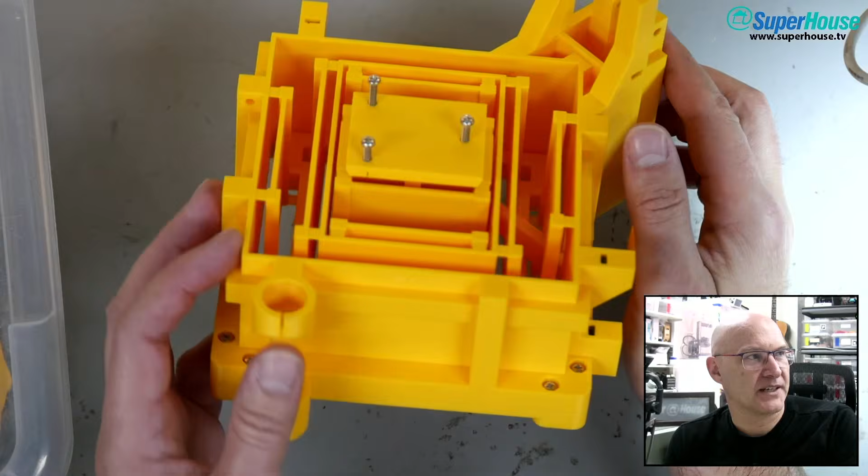So the version of the picker - this is picker v0.2 rather - with the mount here for the microscope arm.

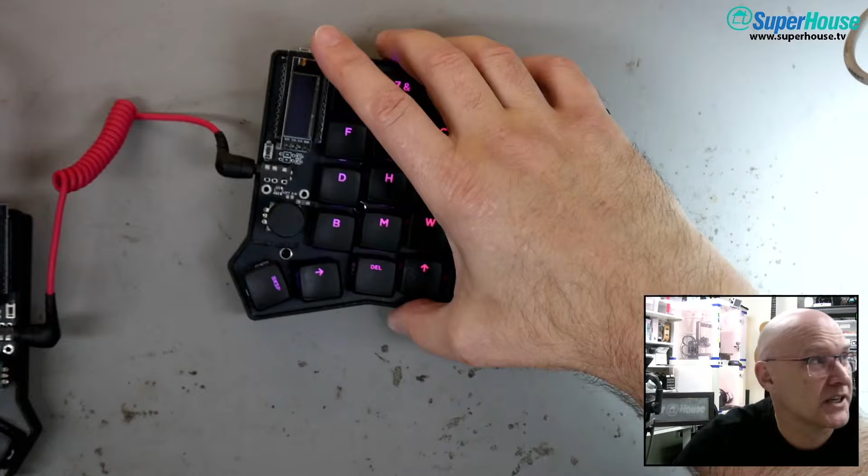So this is my regular daily driver keyboard, which is the Sofle Choc with, as you can see, Dvorak layout. And I've customized, this main part is based on Dvorak, but then I customized the outer parts very significantly.

And these keycaps just arrived during the week. These are the keycaps that I wanted when I was building this keyboard maybe a year ago, but they were out of stock. They've been out of stock. These are, it's a double shot mold glow through, and they are really nice.

I just had a cheap set of keycaps on it for all of this time, and then during the week I went looking, and I discovered that these keycaps had come into stock, so I ordered a set. So I've got a proper set of these keycaps now, and so what I've got is,

Yeah, the way I've laid it out is enter is under my left thumb, space is under my right thumb. So typing English, like just typing text, is really, really quick on this. It's really nice, very low effort.

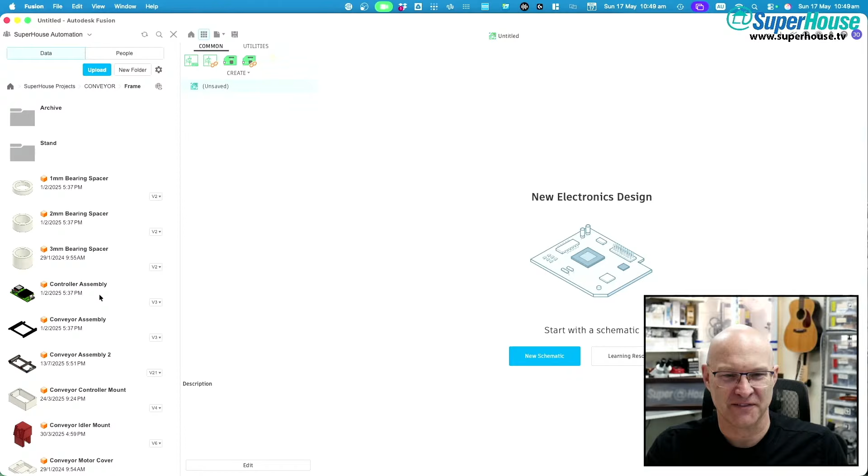Tinker says that explains John's recent tendency to giggle like a kid more - yeah, it does, it does. Cable Tie says I'm visiting Johnny Bergdale's kingdom in December. Ooh, you're going to the kingdom of the King of Sweden? Very good, I'd like to go visit the kingdom of the King of Sweden myself, maybe in the not too distant future. I would like that.

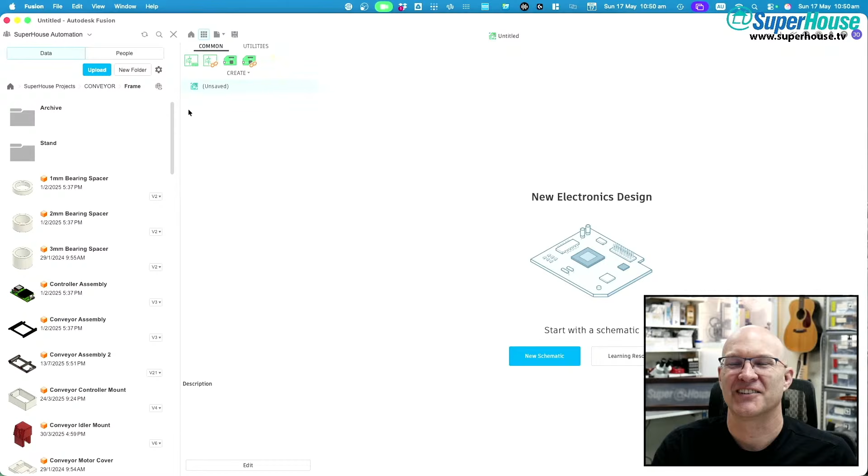I'm just looking at names in the chat now - there are multiple people in the chat who know Princess Fiona in real life, and have known for quite some time, predating me. So I have a question for those people: why the hell did you not tell us about each other like 10 years ago? Oh okay, there were reasons, many reasons. Where are we, NEMA, okay, I'm going to open that one - that one doesn't, right, this one looks better. If you go to Sweden, do you have to get a kebab pizza?

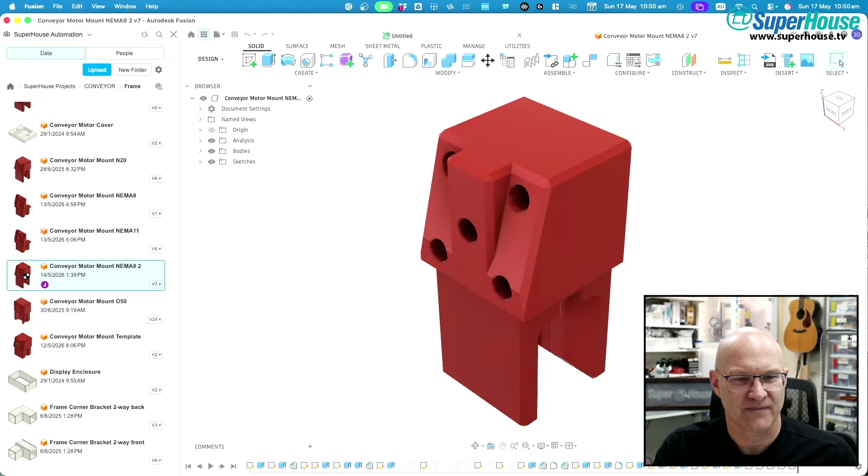Sion says you're so distracted right now, scrolling your file list up and down, up and down. Yeah, it's like a fidget spinner, my hand is on the trackpad and I'm just fidget spinning. I should grab an actual fidget spinner instead.

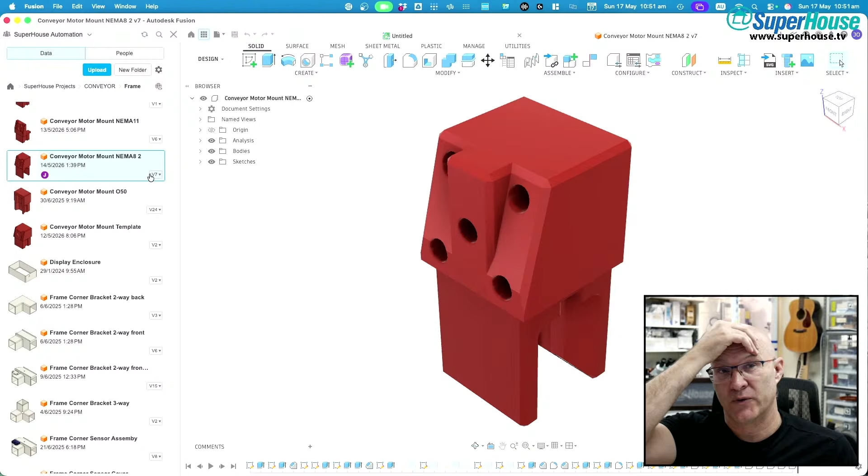Now, I have become very frustrated recently that I do not have functional conveyors on the line. It is breaking me down. Yeah, as Crispian says, the time wasn't right - that's right.

A quick recap of where we left the conveyor project - this was visited probably November, December, I think, was the period where I was messing around with the conveyor last. I can't quite remember. The problem I had at the time was with the drive motors for the conveyor belts. I was determined to use DC motors, and I realize now that was a terrible mistake. I should have paid attention, because if you look at conveyors used on actual production lines, they do not use DC motors, particularly if you have a conveyor that needs to operate at different speeds.

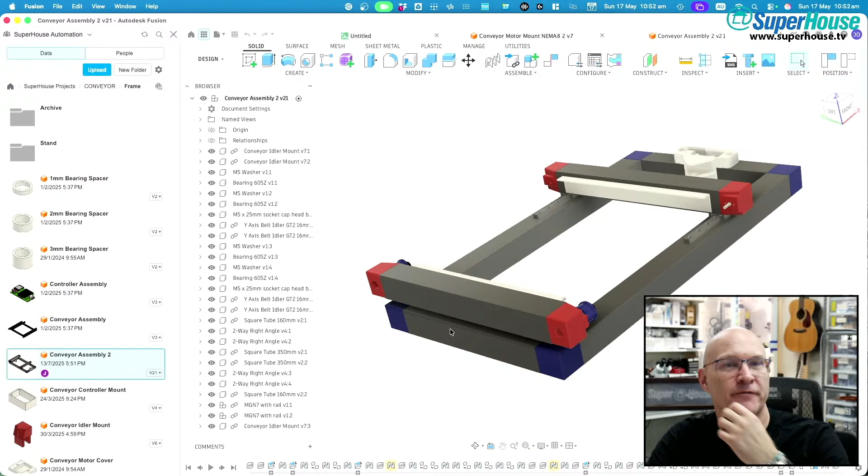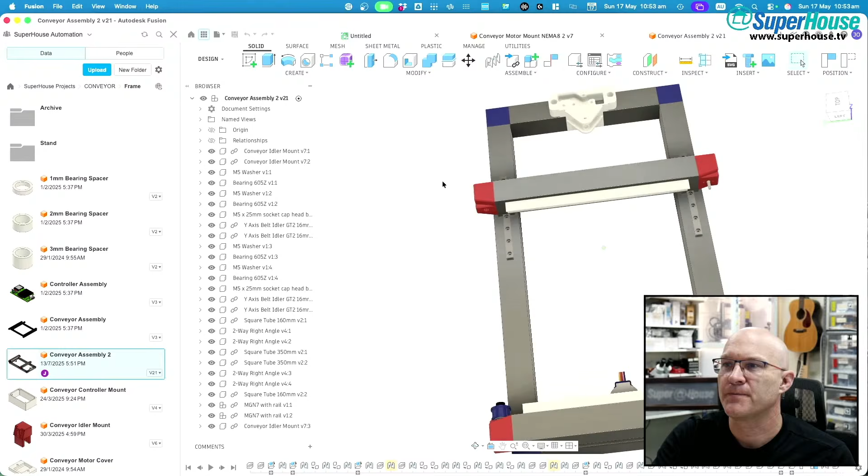What I need is a conveyor that can run through a very wide range of speeds - it needs to be able to run as slow as maybe 115 millimeters a minute up to a few thousand millimeters a minute, somewhere in that range, or faster. It's a very wide speed range. The result is that if you try to do that with a DC motor, if you set up a motor with a gearbox that allows it to hit the top speed on full voltage...

Imagine you've got a 12 volt DC motor, geared such that you get, to use round numbers, 1,000 millimeters a minute of travel on the conveyor, and then you want to scale it down to make it run at 100 millimeters a minute. So you've got a 10:1 speed ratio. If you decrease the voltage, you also dramatically decrease the torque, and it can stall very quickly.

So there are ways around that. You can do things like... Not like there were a whole bunch of viewers asking why in heck you weren't using steppers. Yeah, I know, I know. Oh right, there were. Here it comes. It's going to say it. Oh right, there were, yep. It's because I'm a little slow.

So there is a very wide speed ratio. Now you can overcome that. If you look at things like the way model railroads work, there is a similar situation. If you want to drive a loco so that it starts off very slowly, it starts from zero speed and then very slowly ramps up.

If you want really smooth, low speed control, one technique used for that is modulating a square wave over the drive voltage. So essentially PWMing it, but in such a way that it's at a very low frequency. Not what you would normally consider PWM, which is normally in the many hundreds of hertz up into the kilohertz region - that's pretty normal for PWM driving into a load.

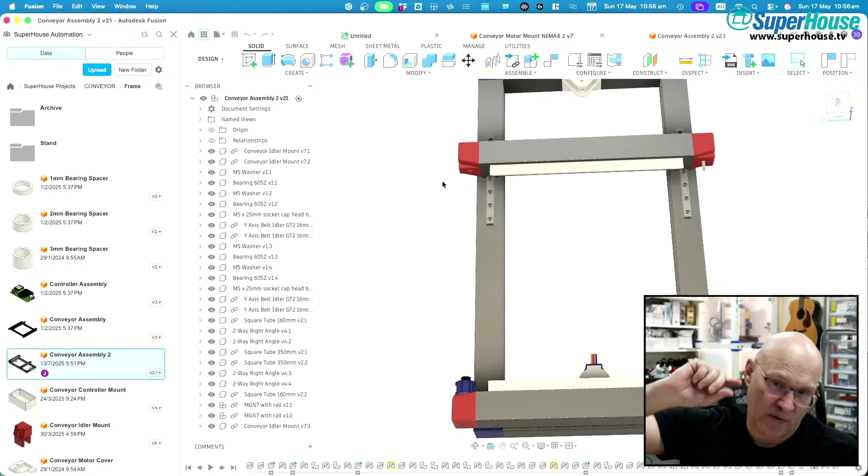By doing very low frequency modulation of the drive voltage, you effectively achieve a higher peak voltage, and it overcomes stiction within the motor. And if the motor is turning slowly anyway, the low PWM frequency can work. But it makes the motors noisy at low speed. So anyway, there are things you can do to make that work, but it's a bit of a pain, and I should have just used steppers in the first place, which has so many advantages.

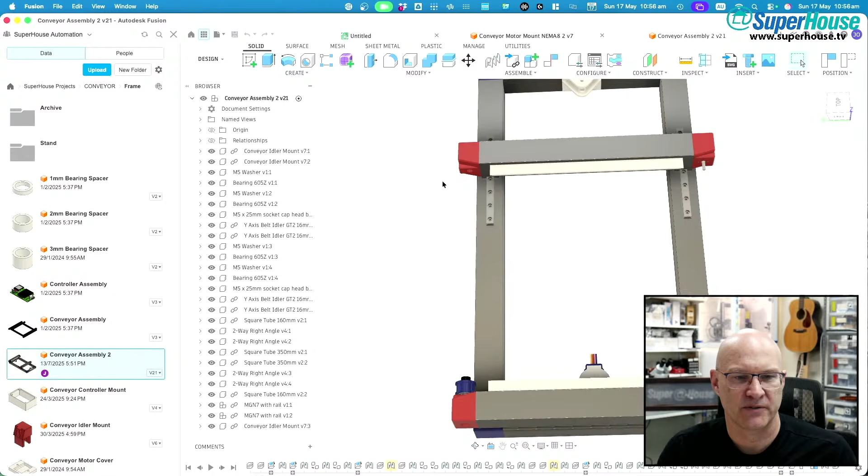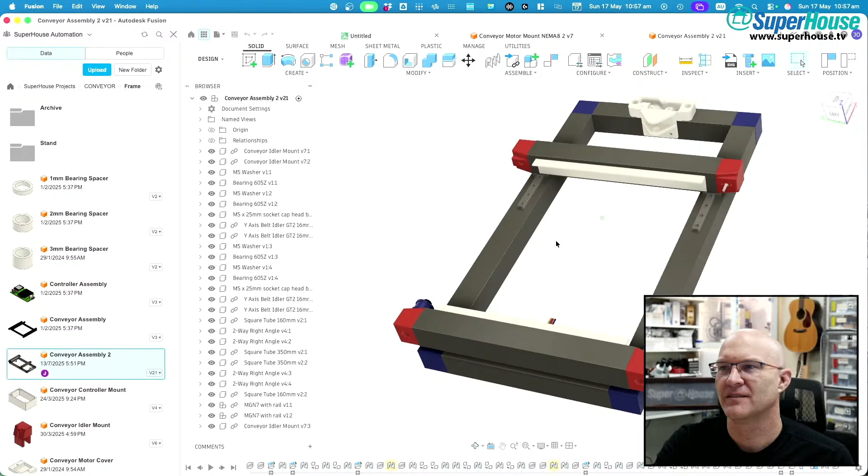Crispian says, I remember my dad had a drill with a motor controller that clearly wasn't compatible - it used to chatter and sputter at low speeds. I think he'd attempted to use an SCR. Okay, yeah. John said, having missed the previous chat about this, you should use steppers. I'm learning slowly. At Tinker001 said, my N-Gauge RR layout used rheostats to control speed. Yeah, N-Gauge railroad layout, use rheostats. Yeah.

So, where am I? Where am I up to? Okay, I went through a couple of options. N20 motors were what I was using. An N20 motor works really well if you don't care about that wide speed range. If you do the calculation on the gearbox, N20 motors come with a whole lot of different gear ratios. So you just figure out based on the linear speed that you want the conveyor.

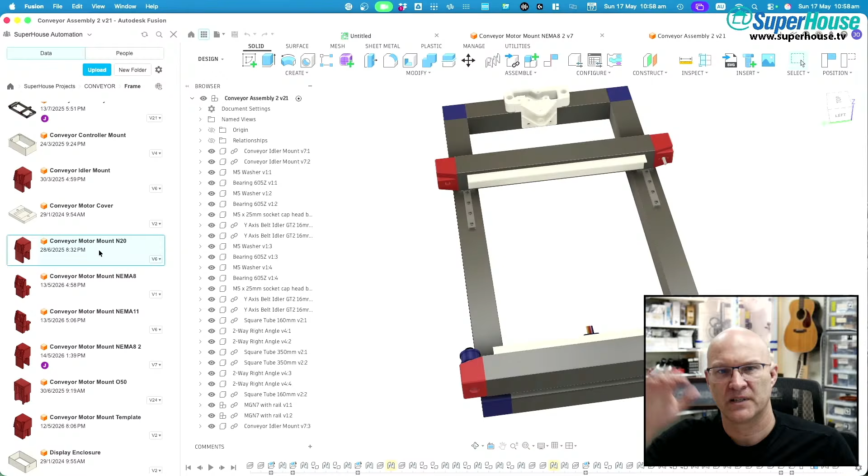Say you want it to run at, I don't know, 500 millimeters a minute, which is quite slow, or maybe a couple of thousand millimeters a minute, which is a more reasonable speed. Then you do the calculation based on the radius of the drive wheel and therefore the rate of rotation of the shaft, and figure out the gearbox ratio. So you just buy the appropriate motor and make it run at the speed you want. That's not a problem. So that was my first version.

My initial prototypes of this conveyor ran nicely with little N20 motors. The problem was I could not make them go super slow. And I want to be able to make them vary in speed because I want to do things like have them accept a PCB from the upstream device at high speed, and then in the case of the conveyor that feeds it into the reflow oven, I want it to slow right down and feed the board off at the speed that matches the conveyor on the oven.

Mine is set currently, I believe, at 115 millimeters per minute. So if you stand there and look at the conveyor, you can see it moving, but only just - it is really slow. So I need to be able to feed the board off at that speed, but I want to be able to load boards onto it quickly at a much higher speed.

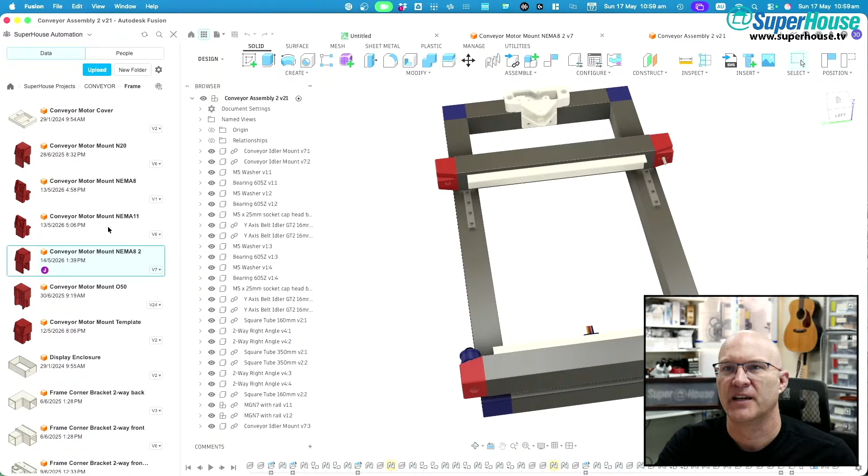So I've done the N20 mount. I experimented with the O50 motors, which are physically a lot bigger, thinking that would give me the torque I needed at low speed. It did not. So last week I pulled out some NEMA 11 and NEMA 8 steppers and experimented. NEMA 11s are physically big enough, so this is a mount for a NEMA 11 to go into the end of the conveyor.

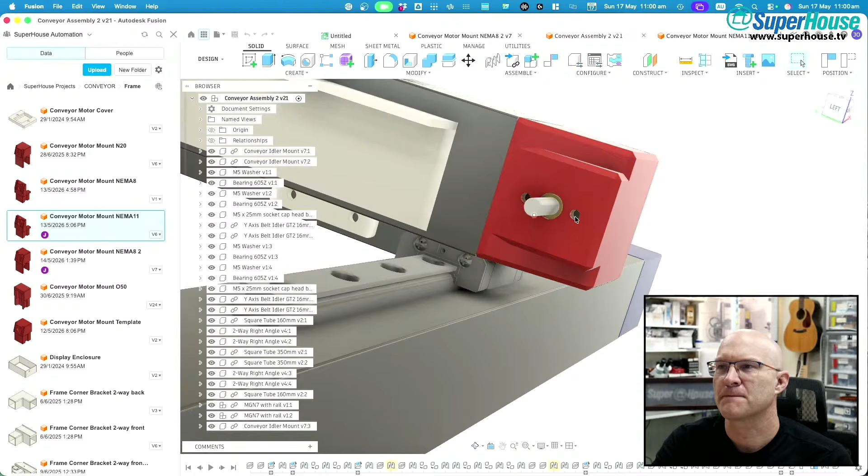So if we look at this assembly, for example, this has got an N20 motor. Replace the belts with rollers. Each roller has its own stepper - yeah, if you're a bajillionaire.

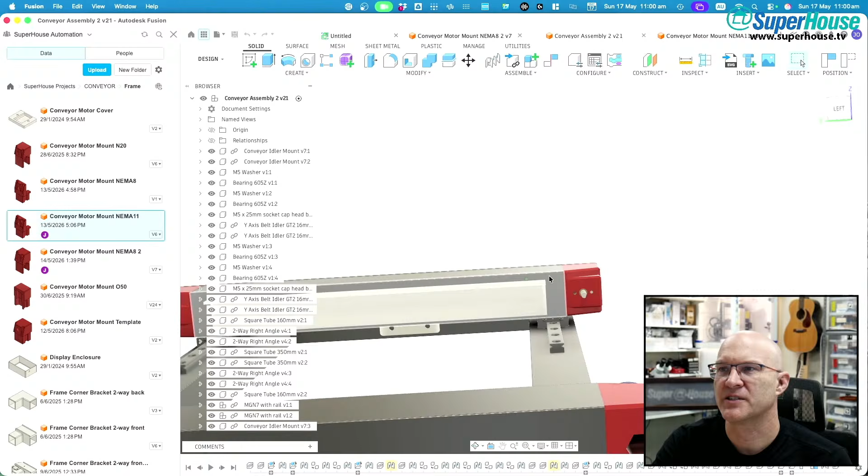So this is the mount for the N20. The distance from the center of that shaft to the center of the idler shaft at the other end has to be fairly precise. It's got to match the length of the belt that goes around it, and then there's a bit of tension adjustment. So this is fixed - this end has the shaft at a fixed position. And I sized this based on the dimensions of the N20 motor.

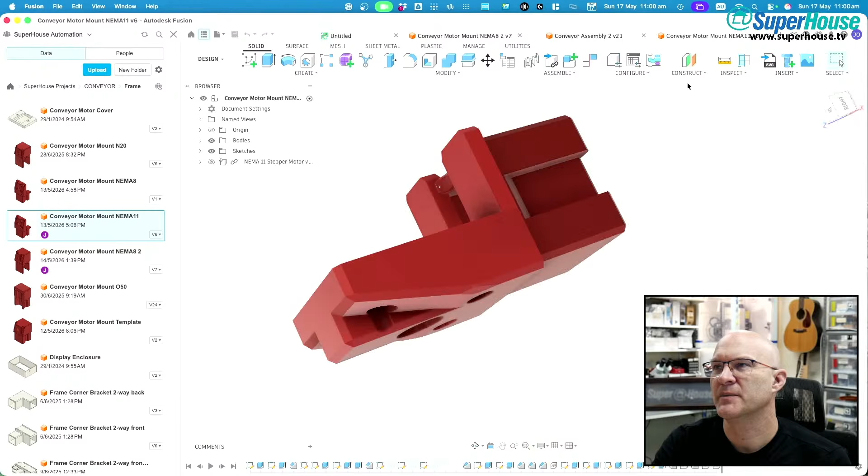But then if you go to a NEMA 11, because they are physically quite a bit bigger - do I have an assembly here? Maybe I don't, I thought I did.

That could be programmed as a linear accelerator - yeah, achieve ballistic board launching.

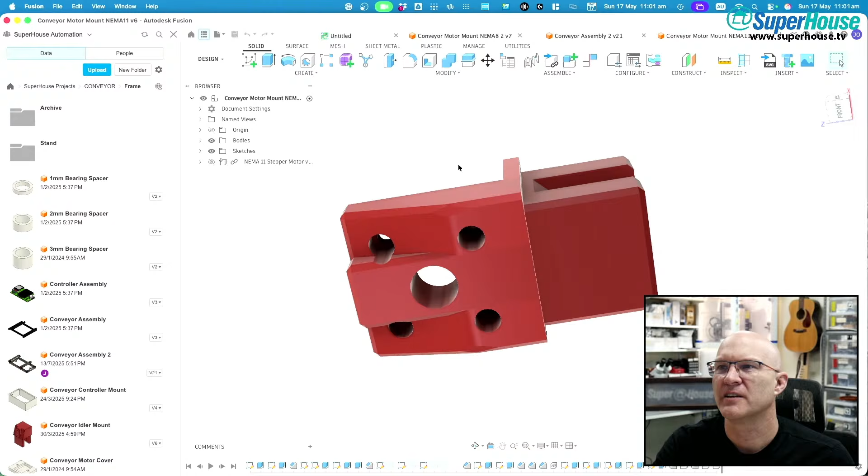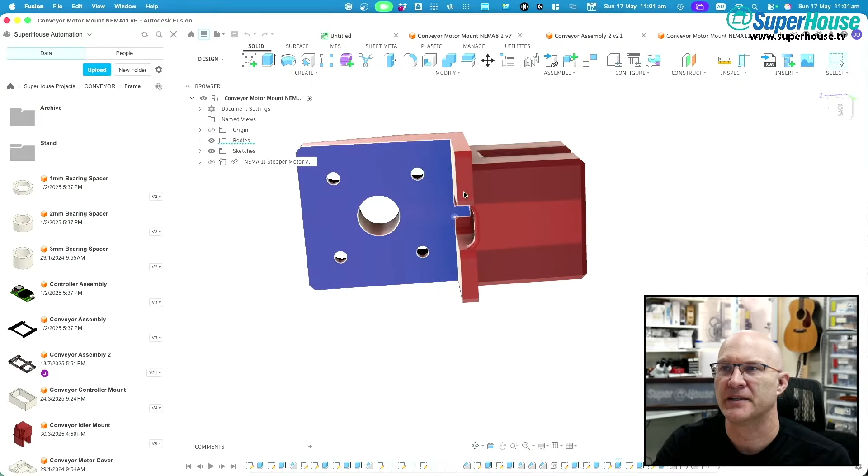So this would fit a NEMA 11 stepper with the cable wrapping around the body, going through this hole and then passing through the inside of the frame. But in order to do this, if you think of this as a square, that face where the stepper mounts, I've had to make bigger, which means it is higher and lower to keep the center shaft in line with the center of the frame. And the whole thing has had to move that way, which means the center of the shaft is now further away from the end of the frame, which then has to be compensated for in other ways.

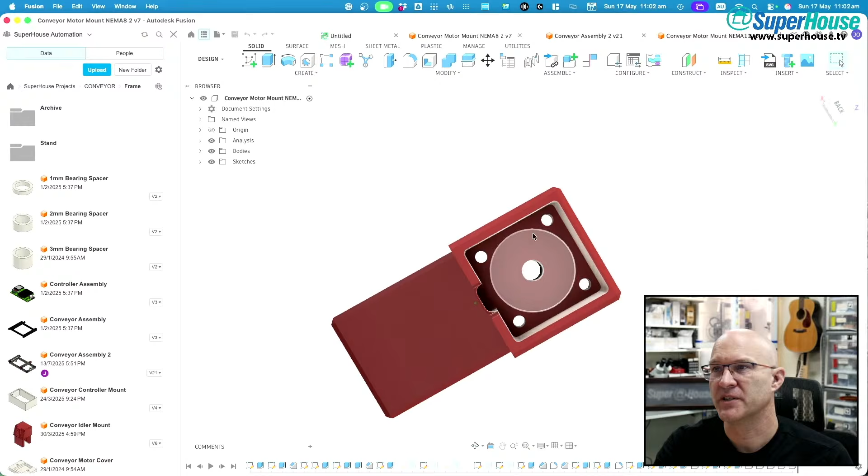So I've designed the NEMA 11 mount and also designed a NEMA 8 mount. This is for the teeny tiny little NEMA 8 steppers, which are so cute. Similar deal, except because it's smaller, it can be fully enclosed. It will sit inside almost the way the N20 motor did and be bolted on from the front. Now there is an annoyance here - in fact, I might close that up. I think I will close that up.

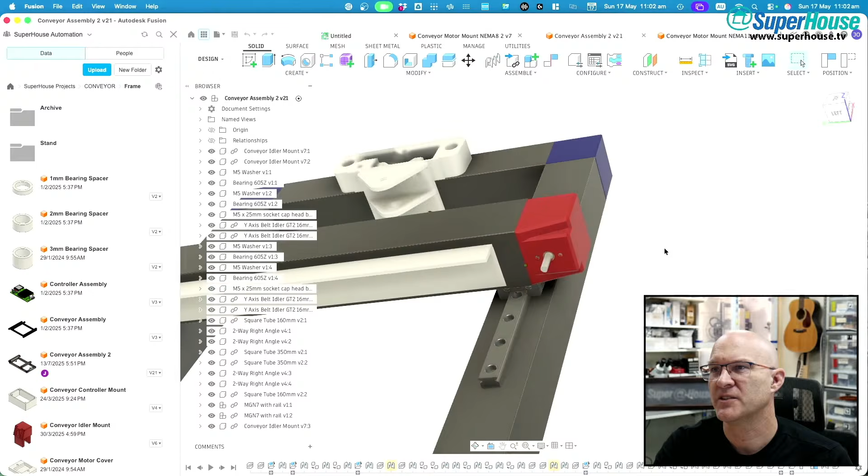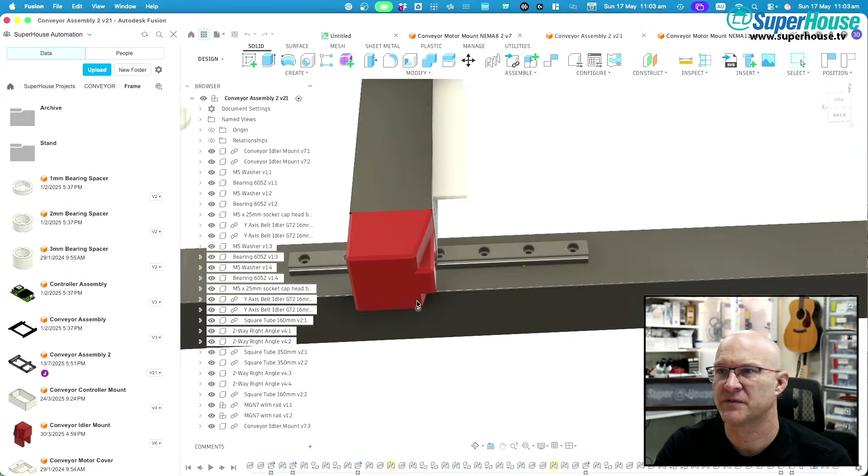The reason there is an angle on here is that's where a board enters, although if it's driven from the exit end, that's not a problem. If you look at it from this end, imagine a board entering the conveyor. These little chamfers on the end here are to guide the board and center it, because it might not be perfectly centered coming off the previous piece of equipment. So if there was a sharp cornered edge here, it could catch on the corner and just jam up the conveyor. So it's got these little chamfers to help guide.

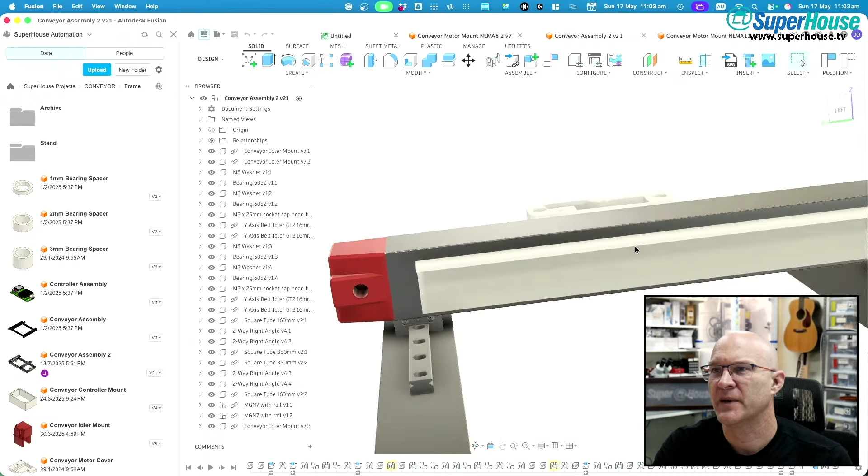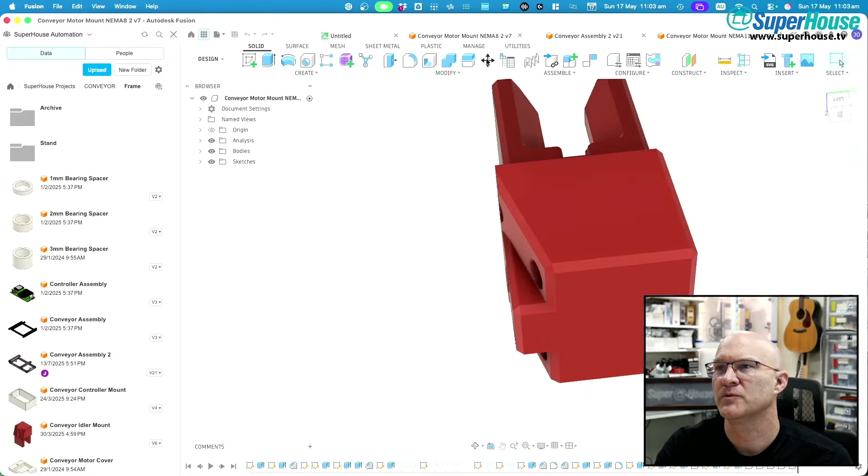So if it's a couple of millimeters off in its position, it'll hit that face and be pushed back into being centered, and it's got that on both sides. The issue is, if you imagine the board rubbing along that face, the lead corner of the PCB could hit this face. So that face needs to be unobstructed - a nice smooth surface for the board to run along. You don't want the edge of the fiberglass of the PCB to catch on that. And with, whoops, this one, right there, look at that - the board is going to hit this face and catch on that bolt hole. So, yeah, it's not ideal.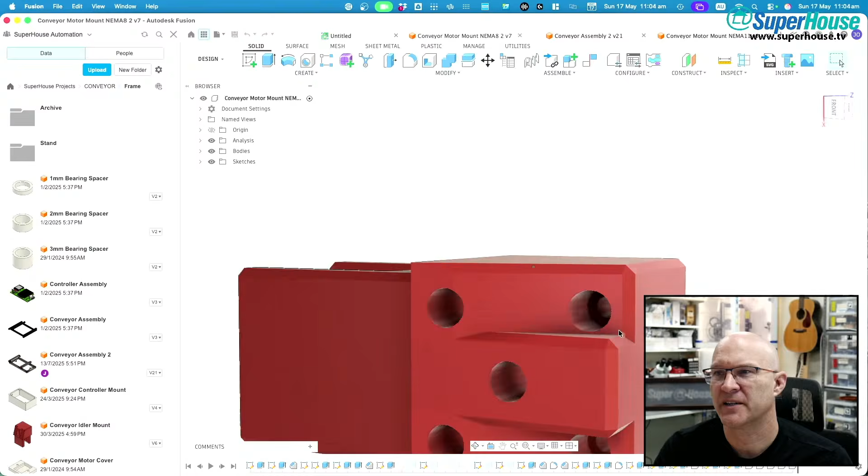I'm going to have to experiment with this. What I might do is remove both the bolt holes that are further back, or maybe I'll make another piece. What I could do is cut this away and make it so the bolts go in and then there is a cap piece that goes onto the top, and that covers it up and gives a nice smooth face.

Simon said, hoping your P&P isn't off by a couple of millimeters. No, in terms of its placement, no. But in terms of the boards coming in on the conveyor, because the conveyor isn't jammed tight against the side of the PCB, there is a little bit of slack. Typically the conveyor is set to be like... Grant Meisel said, just stick a piece of flat plastic on with double-sided tape. Yeah, exactly, that sort of thing. 001 said, if a board hits the face on the exit, something bad has already happened. Oh, if it hits the face on the exit, yeah, definitely. Paul Schultz said, make the chamfer finish earlier. Yes, to all of those things.

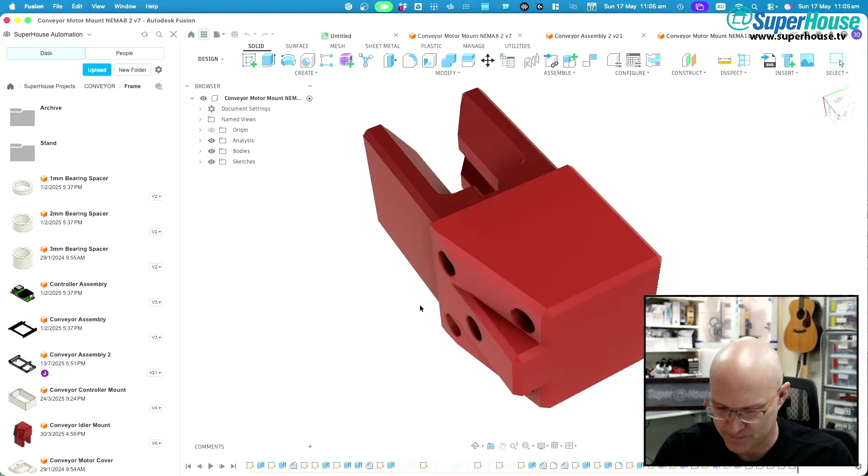So what I was thinking of doing was cutting this face back and making it so that something hard and smooth can be stuck onto that face and provide a nice sliding surface.

It's already 11:05 and I haven't even started on RepRap. So yeah, oh, I've got hiccups now.

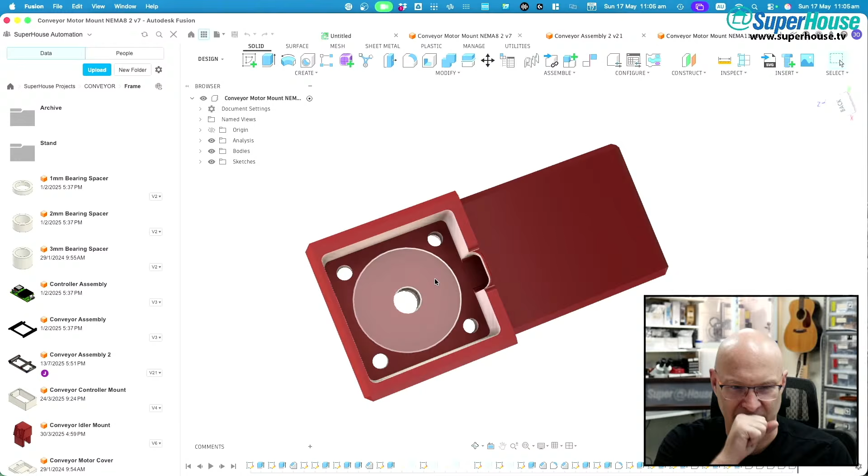Oh, Evil says when the board hits the face, you may need some more space. That's amore.

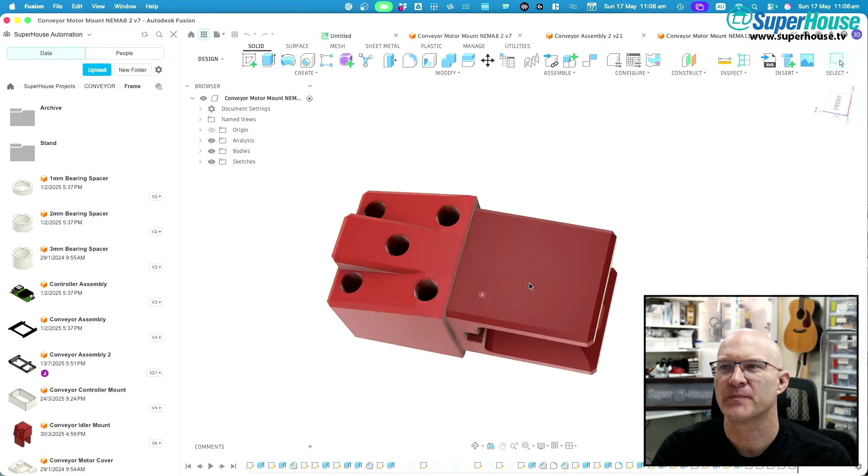Anyway, point being, I am making progress on the PCB conveyor project, but I have not been doing it on stream because I just need to get it done. It needs to be finished. Well, not finished. It needs to get to the point of being functional.

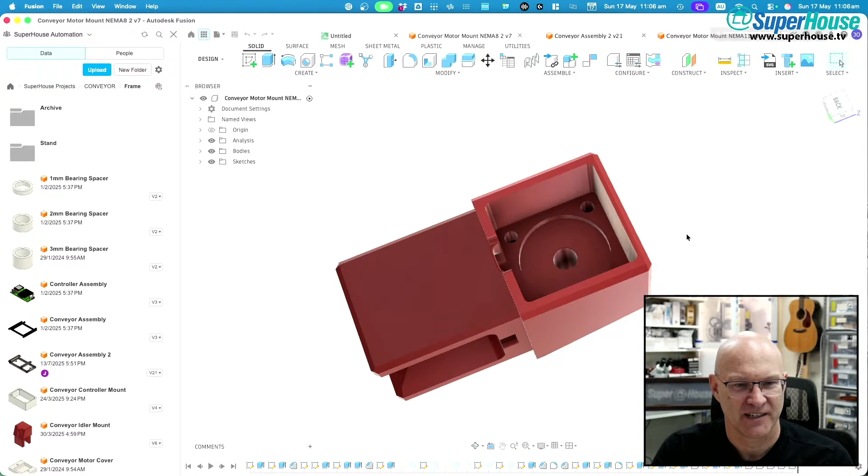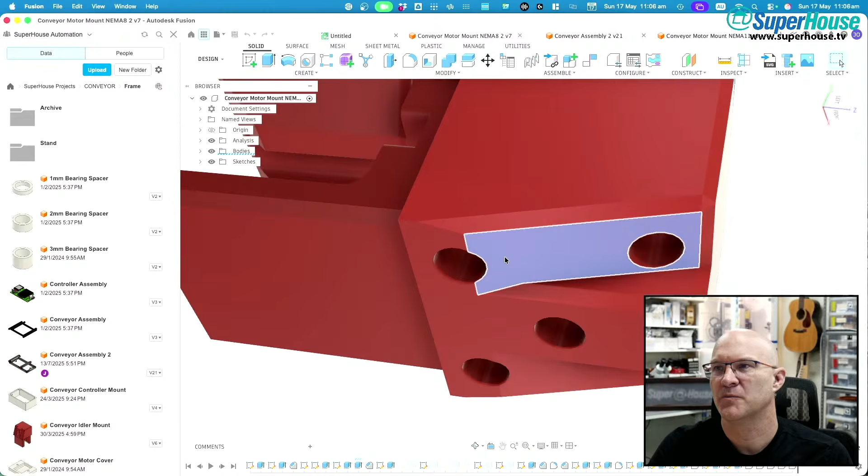And Grant says it will also help with wear, you can replace the surface as the fiberglass wears it down. The thing is that surface could be like a piece of metal, or it could be a piece of laser cut acrylic which just gets inset into it. What I could do is take that face, draw a rectangle in here, and push that face in by say 1.5 millimeters, then laser cut a piece of acrylic that pushes into that spot.

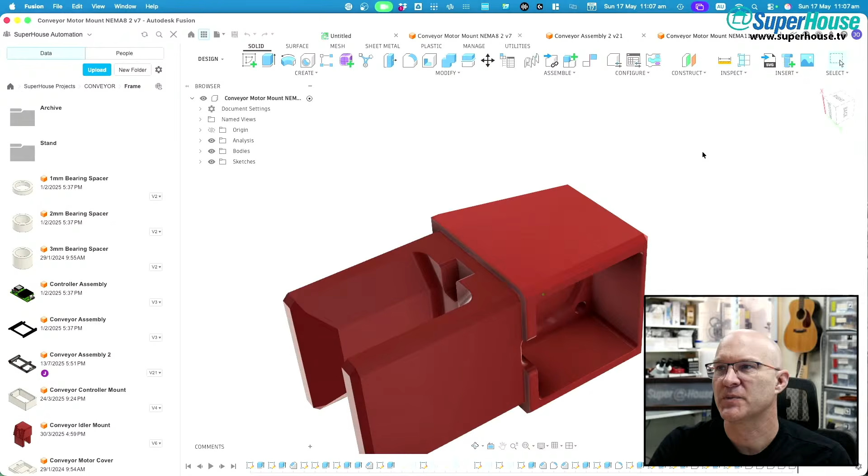And then I've got a nice super smooth acrylic face on there which the PCB would not catch on and should take a long time to wear. Or it could be a piece of metal. So the upshot of all this, I ordered steppers because the only NEMA 8 steppers I have are hollow shaft steppers designed for being the rotational axis on pick and place nozzles, so they don't have the shaft I need to come out here and mount the idler wheel on it.

Finish the design, then have them cast in stainless. Have them cast in stainless. Have them cast, so those pieces could be metal. That seems like massive overkill. But I can get on board with overkill.

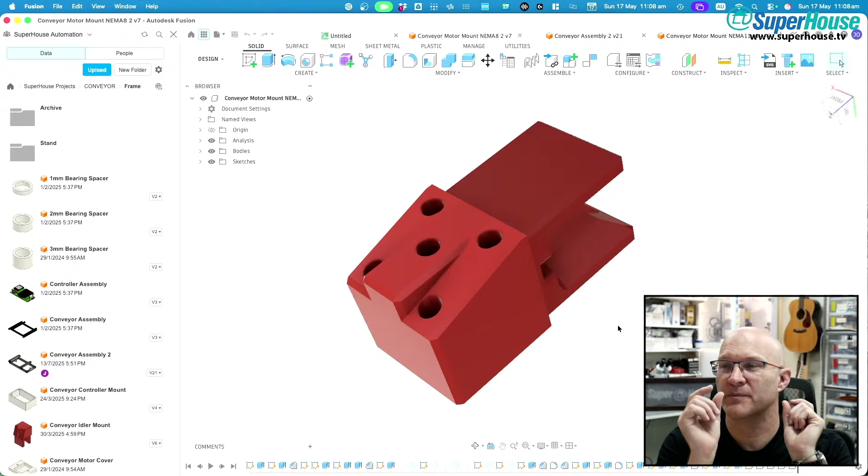Overkill is good. Wagonlight says, can you make parallel rails that open and close at the right time to push the PCB to the center before it enters the next conveyor? You'd have to be very careful though, because you're only gripping the edges, a few millimeters of the PCB edge. If you open too far, the PCB is just going to fall out, so you'd have to open only a couple of millimeters.

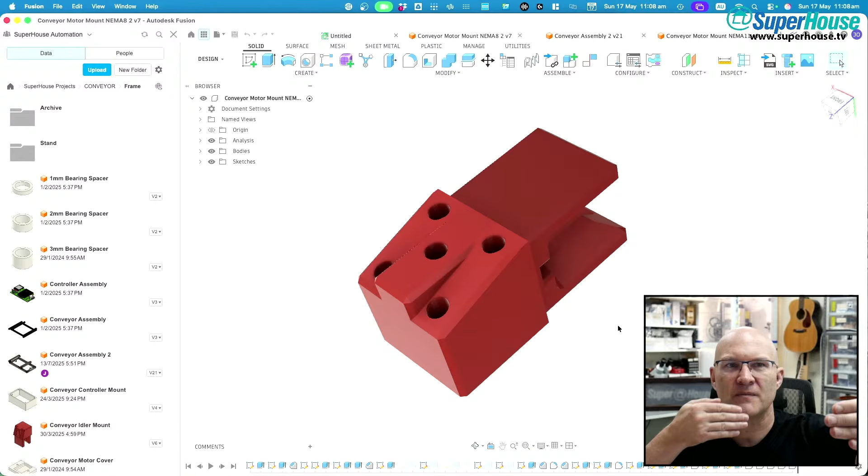Unexpected Maker said, finish the design and then have them cast in pure gold. Yeah, have them cast in pure gold. So what you'd have to do is open the conveyor by only a few millimeters so the board that comes on doesn't just fall on the floor, then close it by a couple of millimeters to align it a bit. But anyway, that all sounds terribly dangerous.

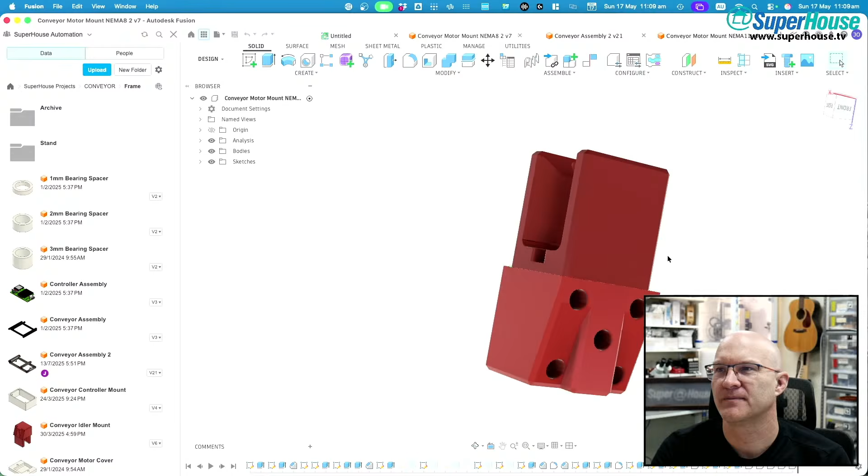And I need to RepRap this Micron. I've got to print some of these, should send some to the printer. I might do that after the stream. Might do it right now. Let's send it to the printer right now.

Save as mesh, yes. And then I am going to... Squirrel, yeah. Tools, X1C, where is there? Do I have a conveyor? PC assembly jigs, do I have anywhere for parts for this? RepRapMicron. I do. Do I? PCB conveyor. Yes, I do, there it is. I just couldn't see it.

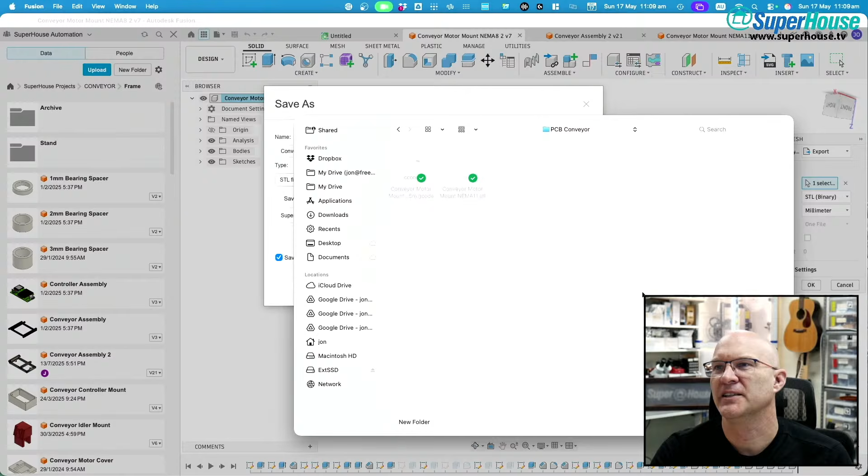So NEMA 8 mount, I did a test print, I believe. Did I actually print it?

I can't remember. All right, now it pains me to do this given all that is going on with Bambu Lab right now. BBL are not popular. Oh, there is a weird thing going on with Bambu Lab where, come on, show all windows, where I cannot get the window to show up.

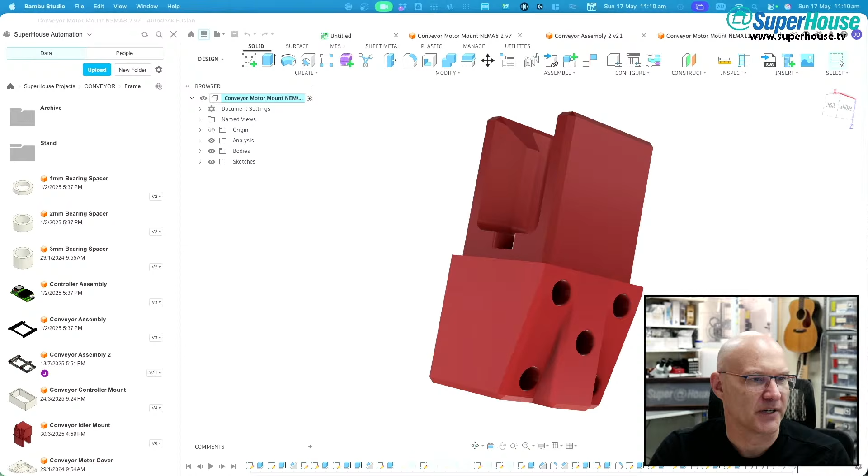Okay, I'm going to kill Bambu Studio. It opens its window off screen somewhere and I can't get it back again. I've tried the gather windows thing and all that sort of stuff. It just... oh, there we go. So if it fails, I've got to quit it. Prepare, prepare. So I feel kind of dirty opening Bambu Studio.

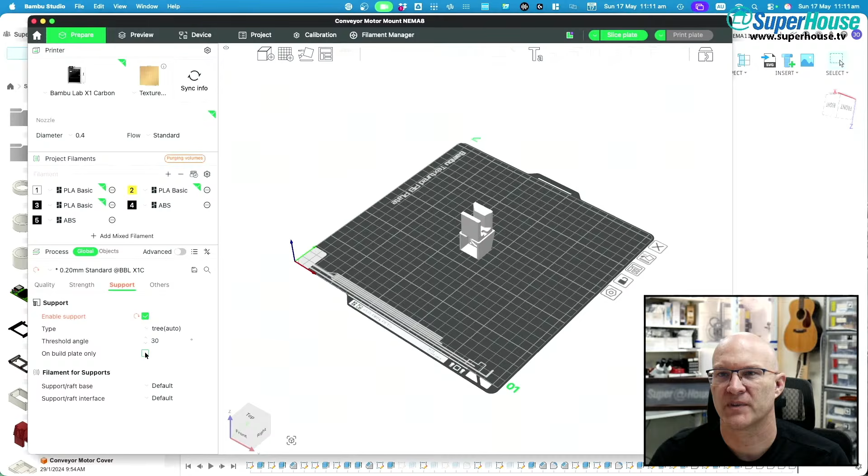PCB conveyor, NEMA 8, here we go. How will we print this? I'm going to stick this on that face. What will I print it in? Standard, yeah. I'm going to turn on support, build plate only, tree. What color? I'm going to do it in that.

Oh, if that's even what's loaded in the printer, let's see. Sync, overwrite, yes overwrite. Okay, I'm going to do it in this funky yellow color. I'll print it in that yellow. I like this yellow. Slice and dice it. And go, yes, go.

See how it turns out. Maybe at... it won't take long to print. What's its estimate? 37 minutes. Okay.

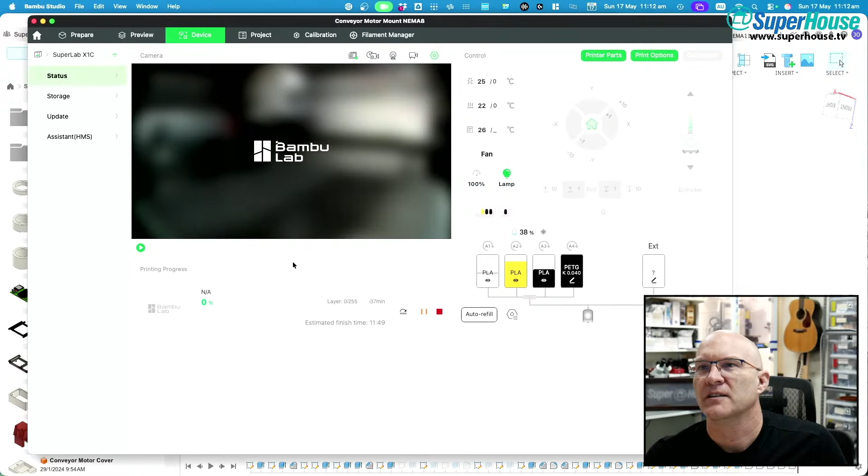I should make sure there's nothing on the printer. I have done this before - I sent off a print and discovered something was sitting on the print bed. Luckily the printer kind of figures that out for itself, but still it's annoying. All right, it looks like it does not have anything there.

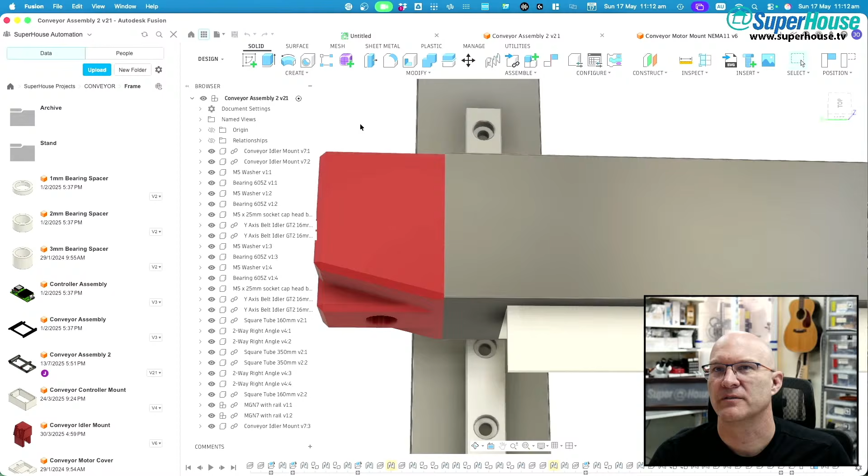So what I'm going to have to do in order to make that work with steppers is modify the most recent version of the PCB conveyor controller PCB. So confusing.

Tinker001 said, you did the live last week. I did that live last week, yeah. I think that was with the... oh, I did that live last week - I printed something when something was already on the printer. What was I thinking? I am losing it. I have no idea what I was doing. Send it off for printing, that's right.

The PCB conveyor controller PCB needs to be modified so that it has a stepper driver instead of an H-bridge motor driver for the main X-axis control. So that's some redesign work I've got to do. What I'm going to do is just rip off the H-bridge - there's one directly on the PCB right now. I'll nuke that and put on a footprint for a step stick, and that'll be driven by the ESP32.

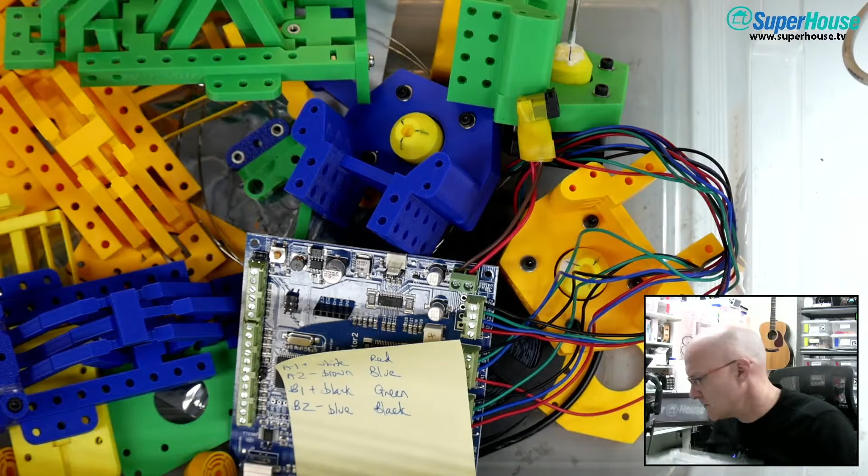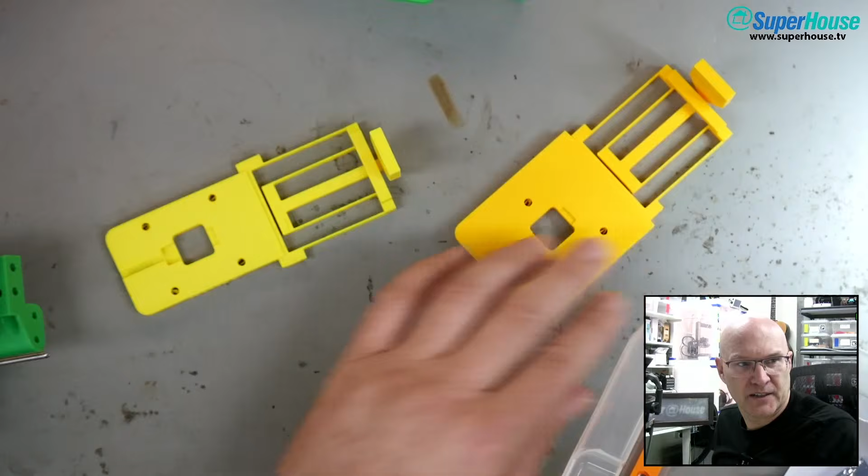We have the stage platform thingy, which needs to have some magnets stuck in it. I could do that right now. Here we have 2 versions of the stage platform, and I've kind of lost track. I believe the one on the left is the most recent design, but I could be wrong because I don't even remember what order I printed them in, and I don't like the fact that it's in that yellow.

Vic says old stage, don't use the 4-hole one. Yeah, okay, that one is the old one, this is the new one. So the 3 holes match the 3 holes on the thing.

Good, I don't want to use that one because it's the wrong yellow. So just to be sure, let's break it. Didn't want to break that way. Okay, break it this way. Okay, this is now a mangled stage, so that definitely cannot be used. That's going into my pile of print rejects.

Here's some wire which I'm going to use for the limit switches. Here is a UV LED and various other bits of stuff. What is this? There's a piece of paper in here. Oh, stepper motor dimensions. Okay, that's not important.

So then, what I could do is stick the UV LED in here. Oh, Vic says remarkably tough, those flexures. 001 said, have you weighed the scrap plastic bin lately? No, I haven't.

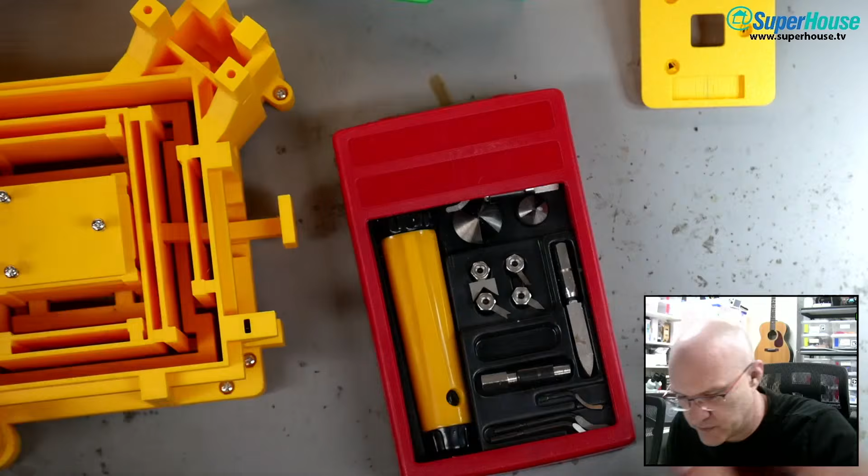Let's clean this up just a little with... let's see what I can find in here. Oh, fancy. Maybe one of those would be useful. Oh, maybe that would be useful. I don't know. What have we got?

It's just an excuse to play with this. I can't get it out. Defective fingers. All right, I need that, which I will drop the blade out of and put the littler one in. And screw that on there.

This may actually be easier with a scalpel, but we'll see. All right, got to get it through because there's already a bit of plastic in there. Bit of deburring. Yeah, nice, seems to work well. I shouldn't be dropping the plastic into the box though. Okay.

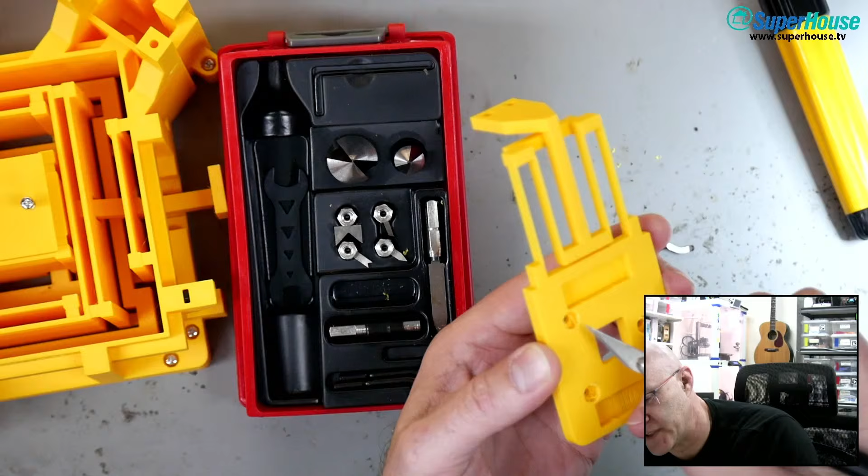Scalpel - find a little bit of cleanup, and then I should just glue the magnets in. So the magnets, as I understand it, just need to adhere to some washers or something that are on the microscope slide. The polarity of the magnets doesn't matter - they simply need to grab onto whatever we are sitting on top of it.

I think that'll do, I think it'll do. Put it away. Okay.

I need to stick the UV LED in here, which means I need to get it off here, which means I need to unravel all of this. So this one's 5 volts - the way these are set up, okay. All right, I'm just going to unravel all of this strip because I want to get to the end. I want to take the last one off the strip instead of chopping it near the USB end.

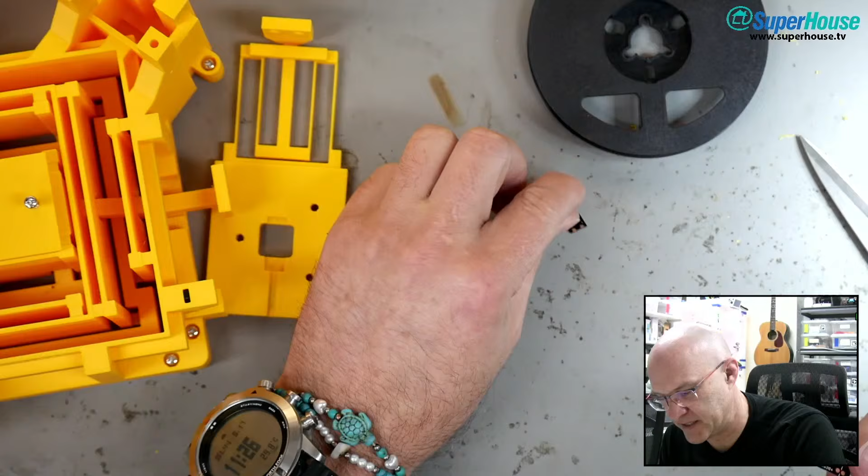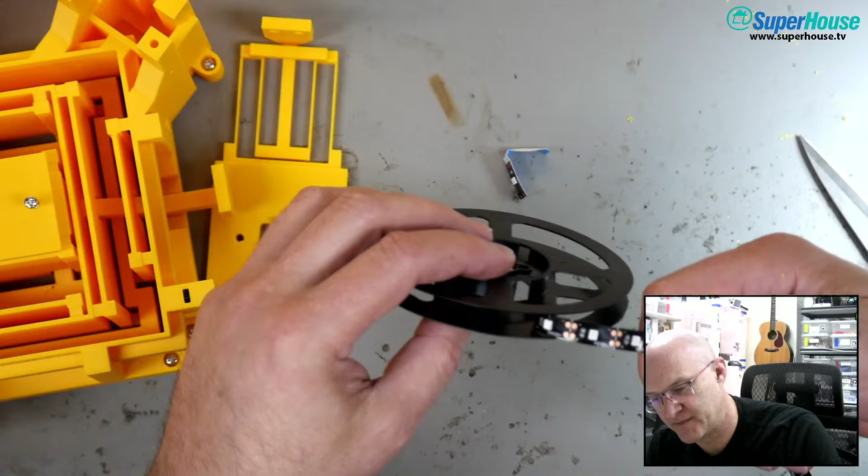And roll this back onto the reel. Come on, come on, this is why they used the tape to stick it on. Oh, maybe I can - oh, come on, I am such a klutz. Grip it from the center. I've got to get it past the point where it binds onto itself. There we go, I think it'll be all right now. No, it's come off. I can't even roll stuff properly.

He doesn't even think about how easy it would be to just use the first one, then reattach the cord to the rest. Use the first one, then reattach the cord to the rest? No, no, that would be harder - it's all heat shrunk on. Yeah, that would not be easier. The easy thing is just to take the one off the end of the strip, because then I can just solder wires onto it, which is what I want. I don't want the USB connector on it.

Okay, I think I'm underway now. I think it's rolling properly. Load it on your old Super 8 projector to reel it in. Yeah, pull it in quick smart. There you go. Gee, machine go.

Getting there. Not fast enough. Okay, the way this is done, the USB cable comes onto the end and it's all nicely heat shrunk. It's well done. I don't want to undo that.

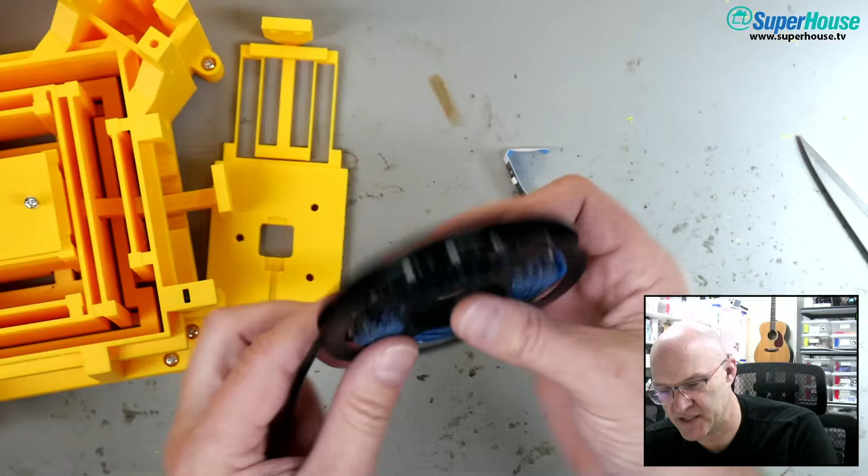I'm probably going to use this UV elsewhere, like for checking. I just want to see if this sits in the right place. Goes on there.

Not quite long enough. LED for something. Okay, so we want it to be mounted like this so that it shines up through the build plate. And it was just one LED, wasn't it? I'm pretty sure it was a single LED that this is designed for. This is not quite long enough. I'm probably going to have to use some glue or something to support it in that location.

But I will first put some wire on it. Now, because of the way this LED strip is set up, every LED has its own individual current limiting resistor. And if you buy a 5 volt or 12 volt UV strip, the only difference will be, I believe, the value of that resistor. This particular one is set up for 5 volts. But we could change that resistor if we wanted to run it off 12 volts or something else.

So what am I going to do? What am I doing? I think what I'm going to do is solder some wire onto this. What wire should I solder? Maybe this wire. Why? Because it's sitting on my bench, that's why. Why? That's why. Maybe it's not long enough though.

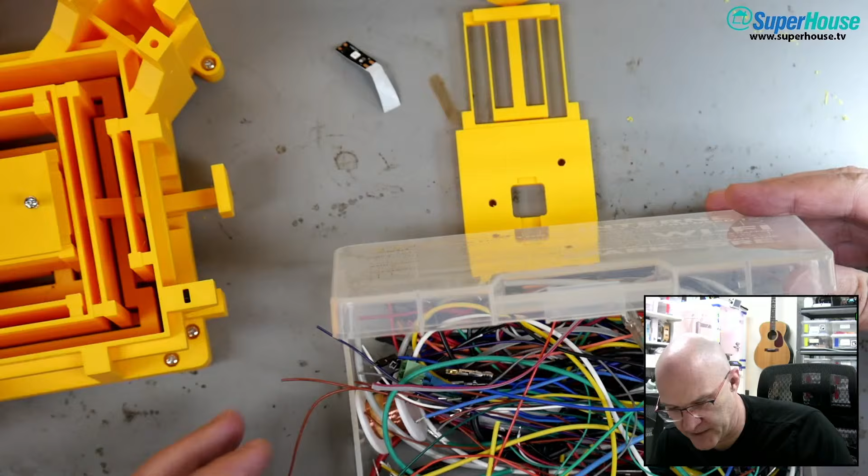Something like IDC cable would be pretty good. This piece is just not quite long enough. And if I get a piece of IDC cable and then strip next to the pin, next to the one that's got the red mark on it, I can even have polarity marking on the cable. So, I have a roll of IDC cable in the clean-ish room. I'm going to go and cut myself off a piece of IDC cable and then strip it down.

Vic says, use the wrong voltage and you get a UV and IR emitter in one. Henrik says, grab a long USB cable, cut one connector off. Yeah, I don't need a USB connector on the end of it because this is going to be switched from the motion controller, I believe. It's going to be connected to one of the switched outputs, like an output you would use for coolant or some other control like that.

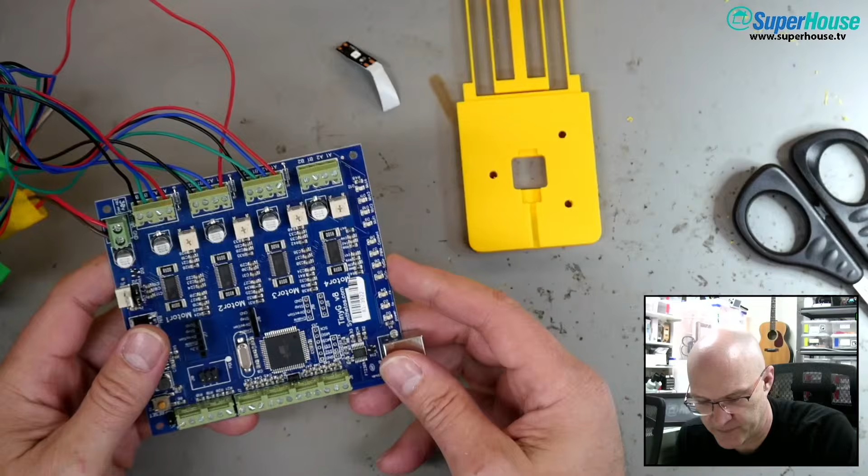Which means I should stop and think about this. What output voltage do we get on the TinyG on things like the coolant output? So what have I got here? No, those are all steppers. Oh, spindle, PWM, cool. All right, TinyG.

Let's have a look at TinyG I/O, because I want to know if that is going to switch through the motor voltage or if it is going to switch a regulated voltage like 5 volts. If I can attach it to the spindle output directly, that would be nice, because then we can just have G-code turn it on and off, which is the whole goal of the way Vic does this, I believe. So let's do TinyG pinout. Let's see what it does.

Wagon Load says, no brag, I'm in the process of designing an ESP32 controlled dual bandwidth UV search head so I can adjust the proportions of each wavelength so I can detect what type of gem it detects. Oh, cool. And Vic says, my controller had 12 volts, so I just put a 680R in series.

Let's find out what... oh come on, I thought I was just going to go to a... hang on, there was a Dropbox pinout diagram. No, that's Arduino Due, not what I want. Yeah, Synthetos, come on, TinyG configuration. Let's see what we can find.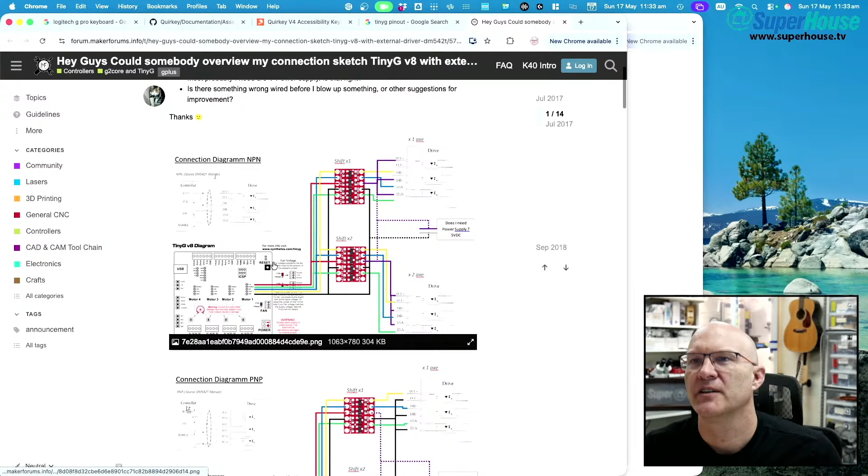Pin connection NPN, so that is off there. Where are the connections off here? PNP, nope. Surely there is a different... oh, Synthetos. How do you pronounce that?

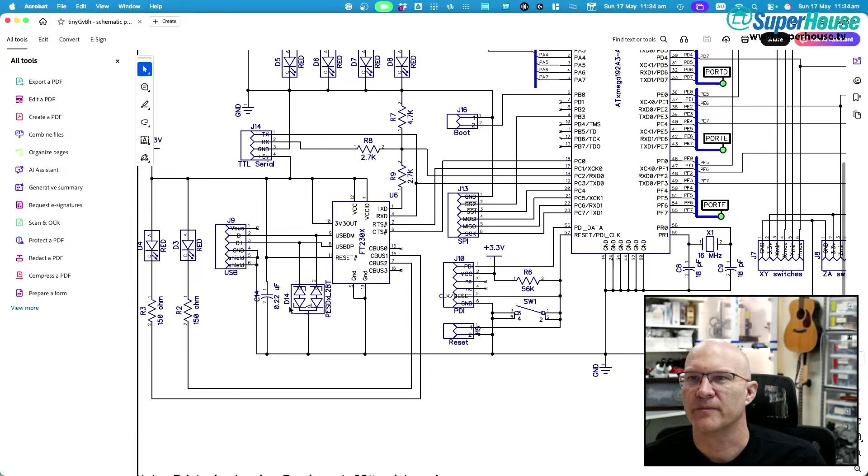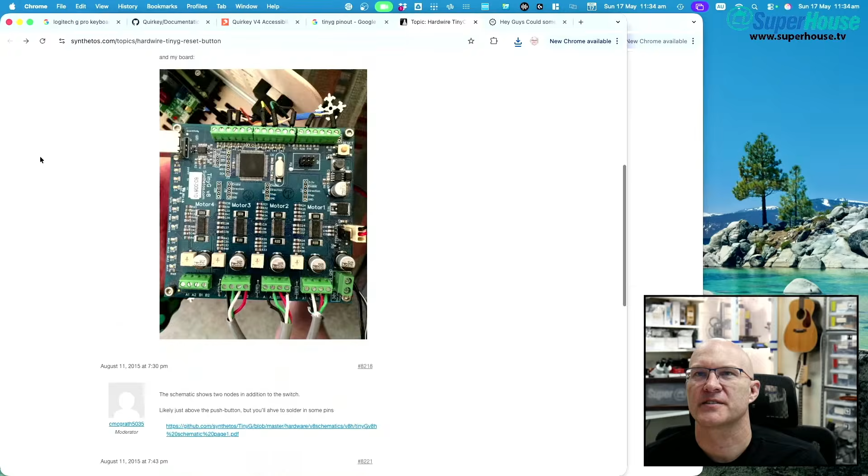Nope, schematics. Why is it broken into pages? And what... come on, come on Synthetos, give me a TinyG pinout diagram.

I know there are people in the chat telling me the answer, I'm sure.

Setup info. Sure, more setup info, let's see if that gives us anything useful. Nope. TinyG pinout, there has got to be a diagram. What about connecting TinyG? Maybe that has something.

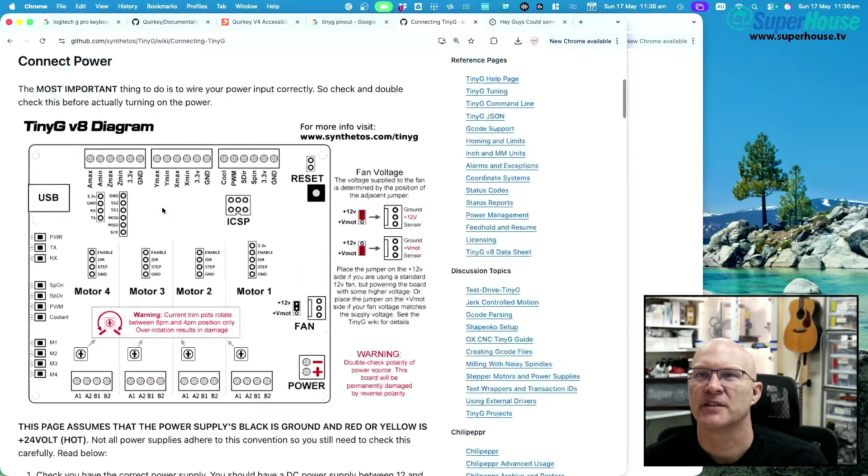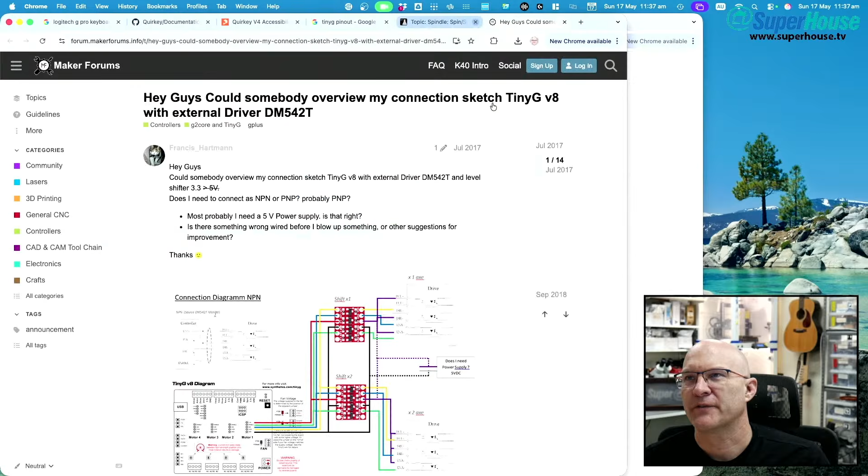I don't want to get sidetracked by this way too much. I am going to ignore that for now, that's a problem for another day, I will figure out what that is later.

Okay, for now I'm going to leave you looking at that while I go and grab myself a length of IDC cable so I can strip it down and solder it onto this LED. Where is... oh here it is, here is a good sized roll of cable.

It's getting to the point now where I need to start putting the various parts of this onto a base so everything is supported, because I'm going to have the Pico, I'm going to have the axis drivers hanging off it. There is going to be the motion controller, which has to be mounted somewhere. So I might get maybe a piece of acrylic or something, like 6mm acrylic so it's fairly solid, laser cut it and make a mounting base for the TinyG. Make a location where this mounts, but it's just a little bit premature because I'm not quite sure what the footprint needs to be once the motor drivers and everything are hanging off it. But I don't want it to go too much further with everything just lying around loose like this. It needs to be all attached and well supported.

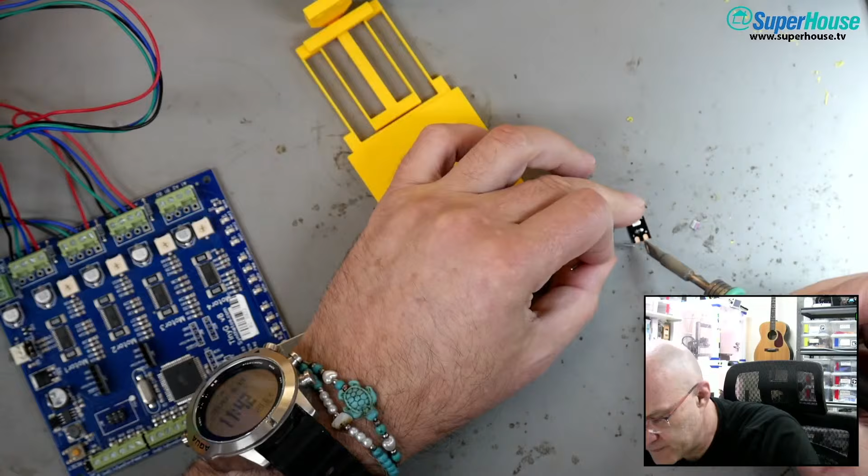What did I just do with the wire? Oh, here it is. Positive and negative. Luckily, it happens to fall the right way around.

Could just use a 1 meter square bit of plywood to mount everything during this stage. A 1 meter square bit of plywood. Yeah, that would be a bit of overkill though. That would be quite large.

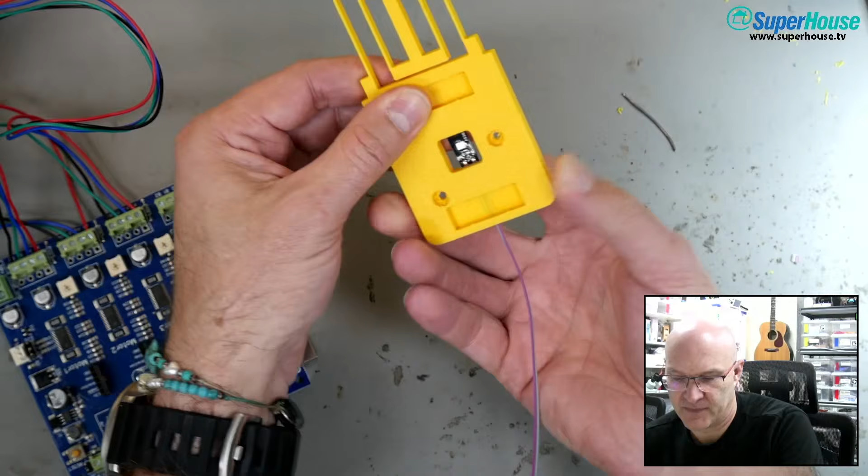All right, so I've got that ready to mount. I want that to be mounted here like that, so that it shines up through that hole in the center of the staging plate, which is where the microscope slide is going to go. Oh, which I've ordered also, by the way.

Now, glue. I need to glue this in. What glue should I use? I think I'm going to use the Loctite gel. I could use UV, I could use the nail polish. But the problem is that I don't think I'd get the UV in to cure it. It would end up being obscured by the LED strip itself. So I'm going to use Loctite.

A little dab of it, just there. Bigger dab there, and a bit there. Okay. And then I am going to have to immobilize this for a while at least, while the glue dries. So this Loctite glue dries reasonably quickly, but it is still just like an air dry reaction. It's not a 2-pack or anything, so it does have to sit for a little while.

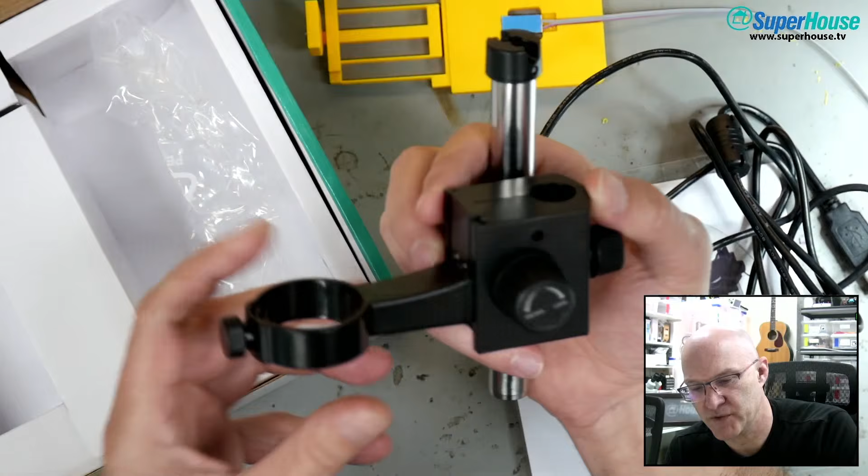So that should go into the picker. Here is the thing that goes over the top. I probably don't necessarily want to do this right away. Ooh, up and down. That's a horrible feeling mechanism.

Lock, unlock, what does that do? Oh, that moves on that bar. Up, down, oh I see. So that's the up, down. Except it's probably meant to be that way. Maybe? What does the picture on the box show? It shows it like that.

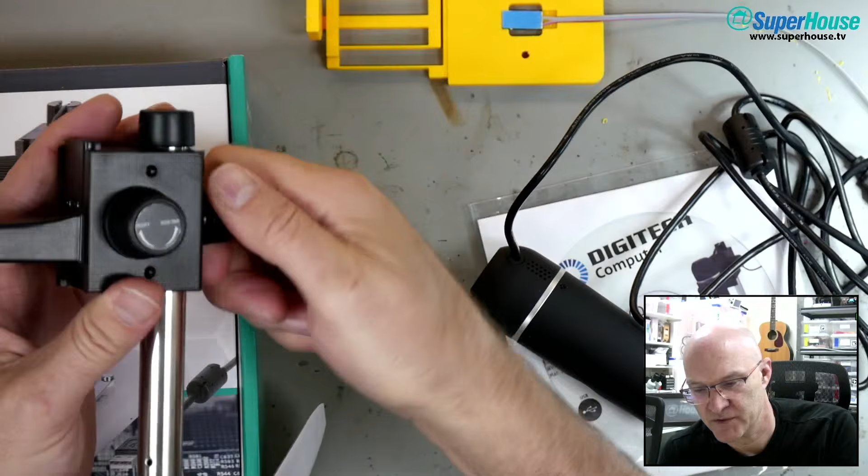So it's got the lock, unlock on the right. It's got the up, down movement on the left. Goes onto the bar, which goes down through it like that, so that the cable can come over the top and be guided. So I'll screw that on, and let's see how it goes on this.

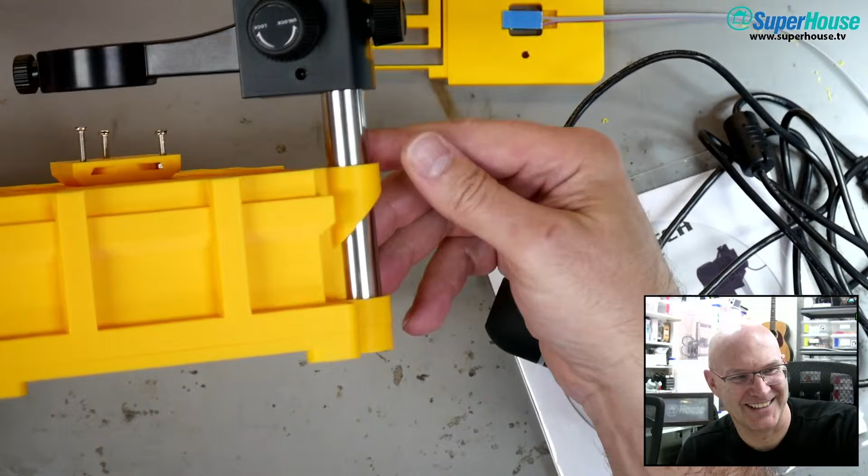I suspect I'm going to need a longer bar because, look at this. I don't think this is going to be adequate. It's going to be really low over the mechanism.

Oh, Vic says that's actually a handy mount with up down, and I designed picker to fit it. Yeah. Oh, Wagon Light says glue the wire in the slot. Yes, I did, there is glue in that slot. So this is all going to end up, the wire will be glued and the LED will be glued.

Now, do I need a longer stem for this? Because, I'm just going to take this off. If I put this into the picker and sit it right down in the bottom like that, it does not come up very high up here.

Maybe it would work if I mount this upside down. So if it mounts that way, it puts the microscope very low. If I turn it up the other way, maybe there's enough room for it. Oh, Vic says you'll need a longer tube though. Right, okay, yeah, so I need to replace this tube. Cool, what is it? It looks like the sort of thing that I would have, like a towel rail tube. It's a 16 millimeter tube.

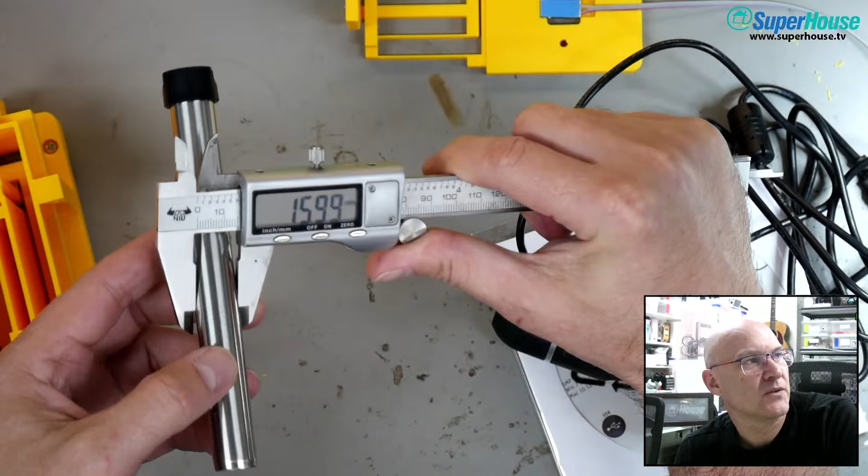Okay, so I need some 16 millimeter tube to mount this on the picker. Cool.

Let's check out this microscope. Plug it in, see if it runs off this USB hub. It may not... oh, the LEDs have turned on at least.

One day John will reliably notice the chat. The world will break.

Curtain rod - Grant says he thinks he has rather a lot of 16 millimeter curtain rod. Vic says 16 millimeter aluminium tube and towel rail can be had from DIY stores. Yeah, towel rail - I'm pretty sure I have a bunch of that sort of rod left over, offcuts from towel rails, from home reno sort of things. So I'm pretty sure I can sort myself out some 16 millimeter rod to go in that.

I have a strong suspicion that the 3D printer is finished now, but I'm going to ignore that for now. What am I doing? Oh yes - oh no, I can hear the printer running.

I am going to launch QuickTime Player so that I can do new movie recording, which allows me to take it from the digital microscope.